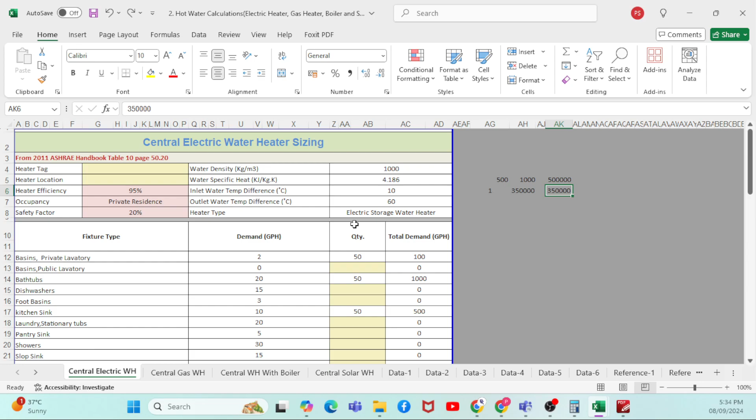Here what is the difference? You have a centralized water heater equipment. Say for example, you have a big water heater, a big calorifier. You heard about calorifier, right? Everyone knows the calorifier. The calorifier is nothing but storage. For normal water, you have a GRP tank or a concrete tank where you are going to store the water. But when you talk about hot water, you cannot store it in the normal water tank. You have to store it in the calorifier, which is insulated to be capable of storing that hot water.

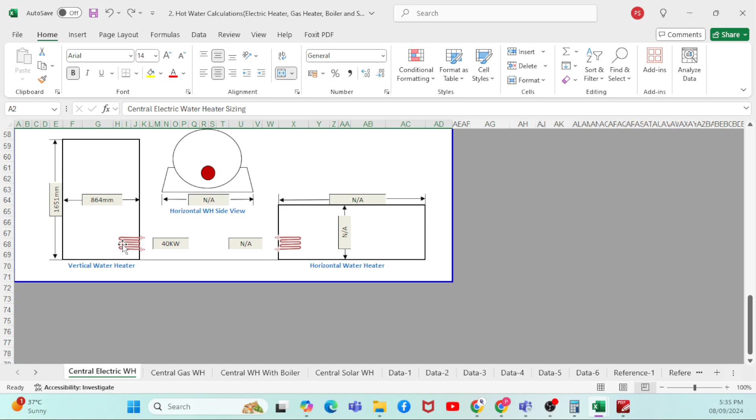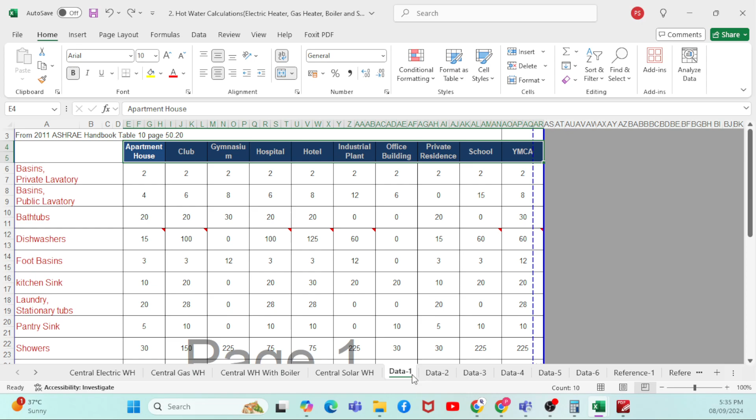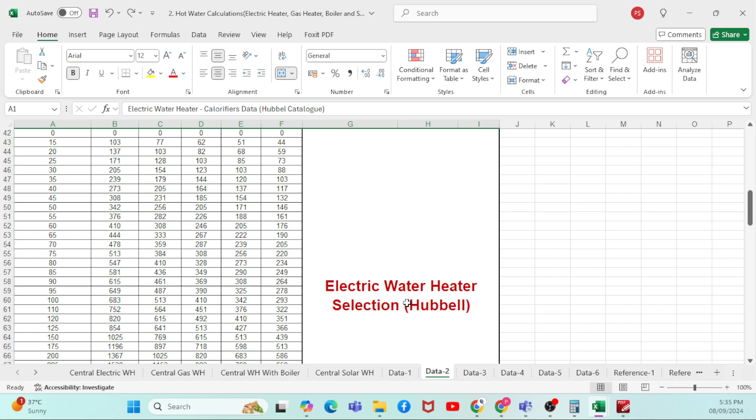So this particular equipment is called a vertical water heater, which is a very big water heater, like a calorifier with the electrical element inside. This electrical element will be calculated based on the capacity we are going to calculate. Clear, right? Now if you go to the data sheet, you can see that there are two items. One is the electric water heater calorifier data sheet, and another one is the electric water heater selection, the water heater element. So here is how we are going to calculate the central water heater.

Say for example, you have the same calculation. The only difference is the number of equipment will be more. Assume that if I have 500 keys, I may have 500 lavatories, 500 bathtubs, and 500 kitchen sinks. Based on that equipment, you can see the total water requirement, which will be 16,000 gallons per hour. So it's huge. You cannot go with individual water heaters. Assume the total consumption will be this much.

Based on the same calculation, you can calculate 0.3, the demand factor for that particular application for private residence. Then you can calculate the total probable maximum demand, the calculated storage capacity, and then the total thermal power requirement. Up to here the procedure will be the very same.

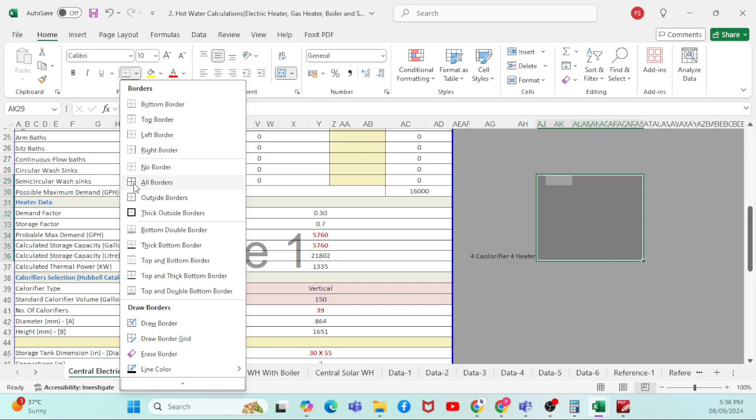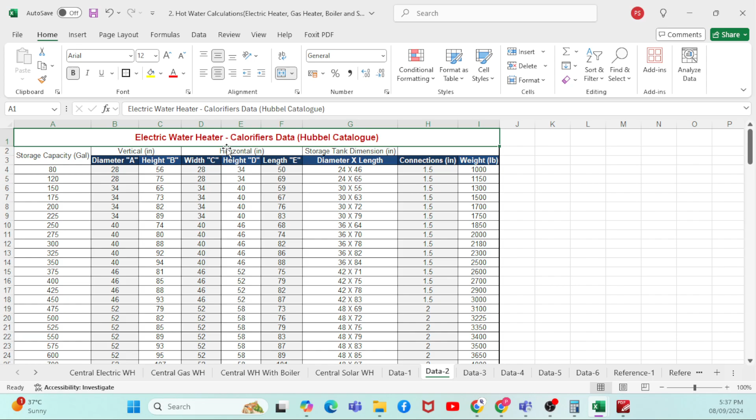But why do you need the selection? Because say for example, I'm going to go with one equipment room. When I do the space planning, I want to keep all my equipment there. If it is a vertical water heater or horizontal water heater, I should know the size, right? So if I go to the data sheet, I can calculate my total water heater calorifier requirement, the storage capacity. Based on the storage capacity and the manufacturer, I can calculate the vertical height, or if it is horizontal, the dimensions, so that I can do the space planning. So what is the overall height of the storage tank?

Clear, right? Anyone have doubt? Selection of water heater for the individual water heater, for the centralized water heater. No, sir. It's okay. Okay, so this is based on the storage capacity.

So when you talk about individual water heater, your capacity will be assumed 15 liter or 30 liter or 50 liter or maximum like 100 liter. But when you talk about centralized water heater, your capacity starts from 80 gallon to 5,000 gallon.

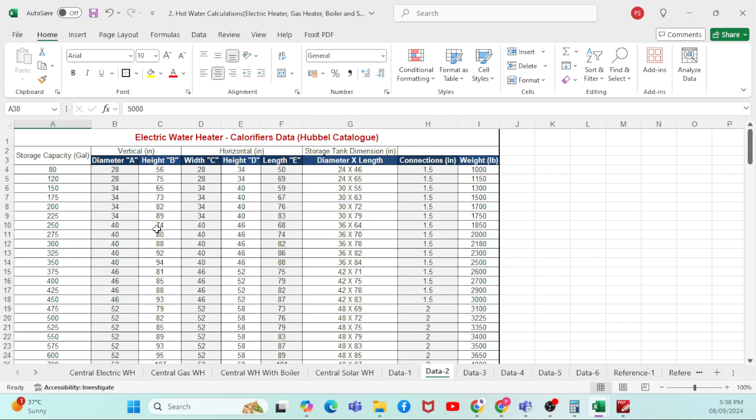So if I talk about liter, it starts from 300 liter to, say for example, 18,925 liter of water. I can design with a centralized water heater.

So depending upon that I can select vertical water heater in case A and B. In case I go with horizontal, what is the width C and D and length. If I go with the circular, then I have a diameter and length. Then I have a connection size, I have a weight. So depending upon this dimension I can select the room spacing. Clear, right? Then I can select the input power.

Input power, you need not do the selection by means of this manufacturer. You can also do the calculation, or if you want to go with the manufacturer selection, they have given the input value here, and then the gallon per hour, how much gallon per hour based on the temperature, you can get the input power. So depending upon that you can select the centralized water heater.

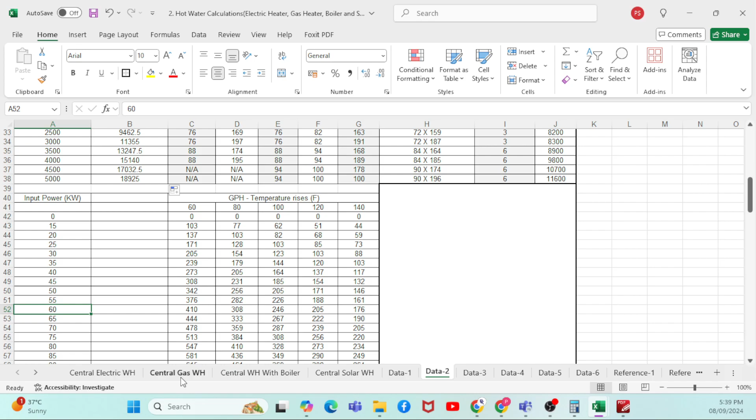Any doubt, Aditya, Rias? Simple method. If we calculate, we only need the total gallons for selection? There are two items required. One is the total gallon, and another one is how much heat is required, or what power is required, because power and heat are the same. Clear, right? Yeah, clear.

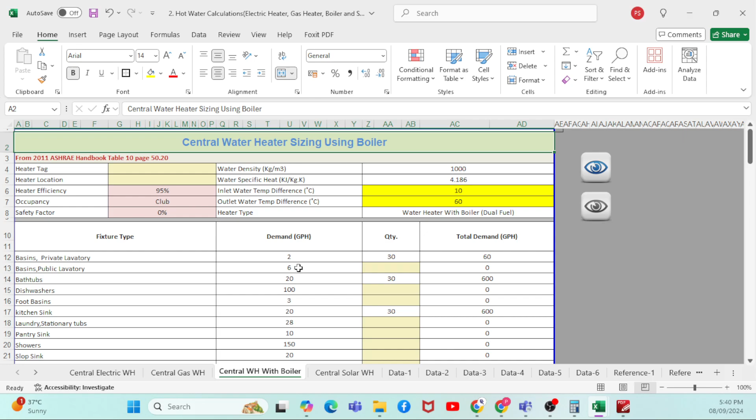Next we will go with the centralized water heater with a boiler. The procedure remains the same. Say for example you have different types of fixtures here, then you have different quantities depending upon the requirement, then you are going to calculate, right? Then you select the material. Depending upon the demand factor, storage factor, probable maximum demand, you can calculate the total storage capacity and thermal power. Up to here everything is the same.

Similarly to how you select the central electric water heater, you are going to select the boiler. I'll be sending you one video for the boiler; just watch the video and you can understand how the boiler works. Say for example this is the boiler. Inside there is a furnace. So when you switch on the burner, this furnace will produce the heat inside the furnace coil.

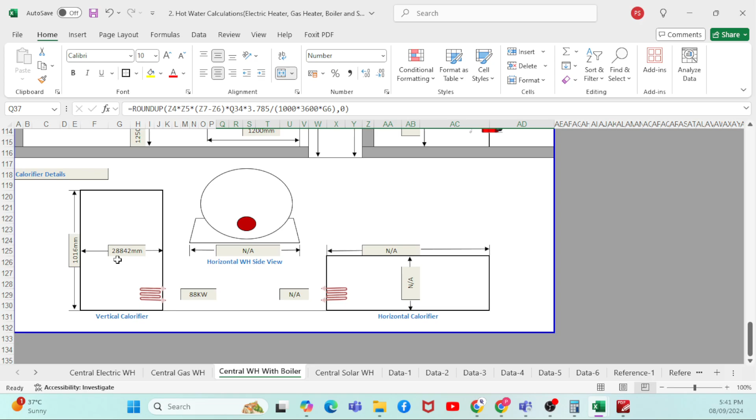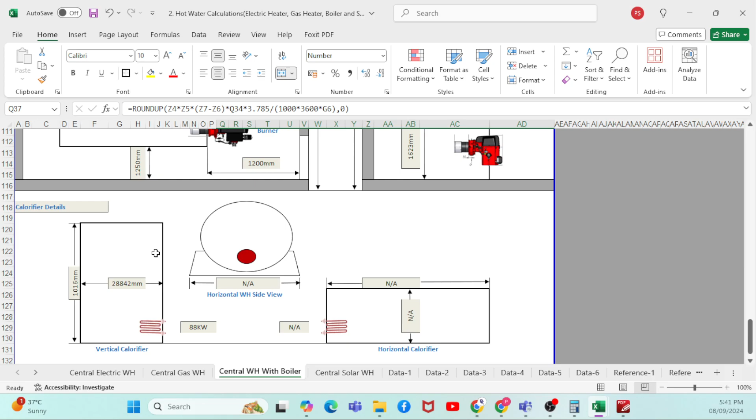With this furnace coil, you will have a calorifier here, then from the calorifier to your boiler there is a water supply connection. There is inlet water and outlet water to the fixtures. Between calorifier to boiler and boiler to calorifier, there is a closed circuit, which will transfer the heat energy. Instead of a heating element, there will be another coil inside connected to the boiler. You understand what I'm saying?

Now, when the burner is on, the burner will produce the heat. It's the same as if you go to a coffee stall or tea stall where you have a furnace; the boiler and furnace are the same concept. The furnace will heat the water, and that water will be transferred to the calorifier, and that hot water will be utilized for the plumbing fixtures. So here the elements are the water heater, calorifier, and also the boiler selection.

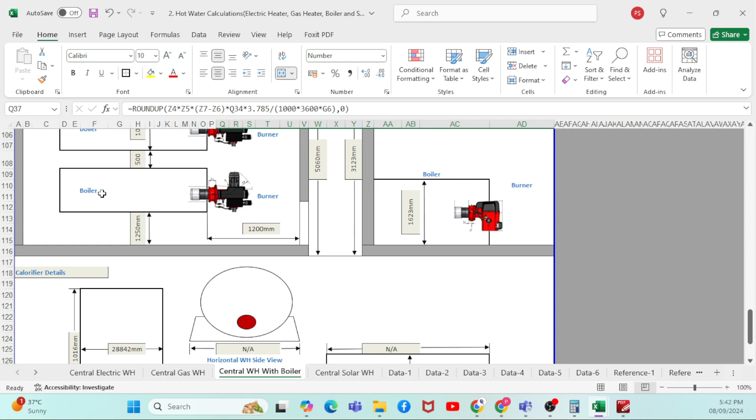So when you go to the data sheet, you can see the boiler here. This is the boiler, you can see the furnace. This is one of the manufacturers, Viessmann. With this manufacturer you have different models, and each model depends upon the capacity, rated output, how much heat is required. This heat is what you are going to calculate here.

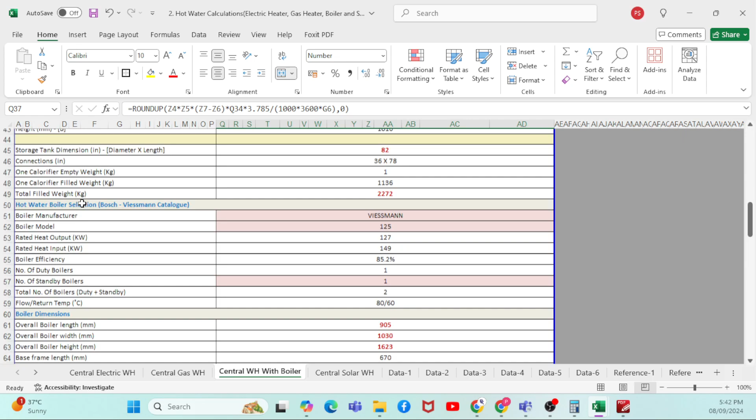Remember, when you calculate how much heat is required, based on that heat you are going to select the equipment. Now since here it is 88 and the gallons per hour will be 486, how are you going to choose? You can choose 300, two numbers, or if you choose 500 it will be one number, because my storage capacity will be 486.

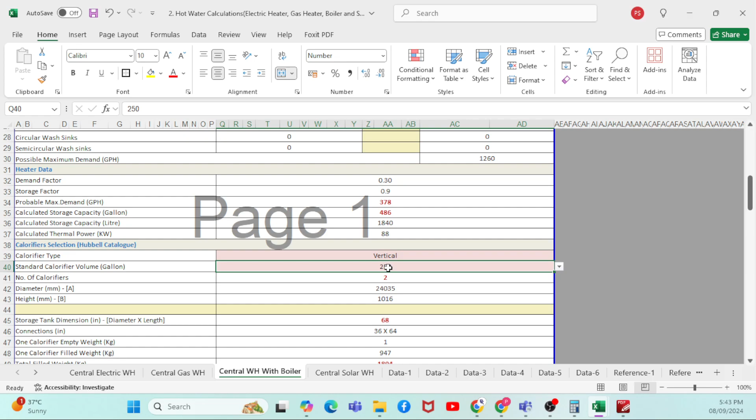If I choose 250, I need two calorifiers, right? Because this is the storage capacity. So what is my calorifier type? 250. So if I go to this particular model, I can select a calorifier of 250 gallons, two numbers. This is the electric water heater calorifier data sheet. I can select two numbers.

So what is the dimension? If I do space planning, inside I have a boiler and a calorifier. Based on this dimension, I can size my room. And if I go to the boiler, what is required? Boiler length, boiler width, boiler height, then base length, base width, then installed burner height. This is all the dimensions, flue and connection details, everything.

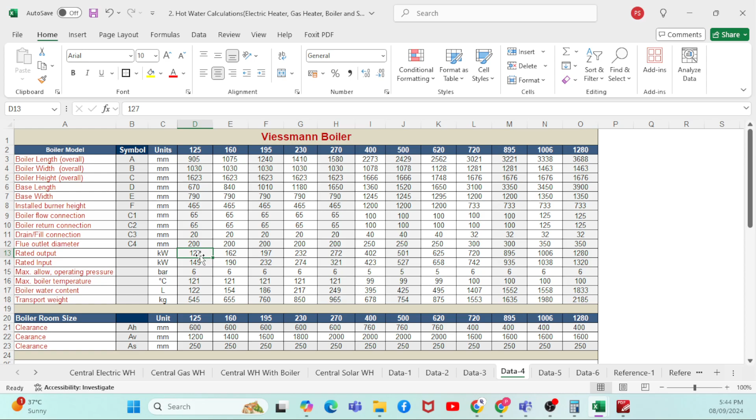But what is the technical data? This is my rated output, how much heat I have to produce. So if I go to my boiler, what is the heat? 88 kilowatts, right? So in the data sheet, I can choose the 125 model, because I need 88, but this particular machine can produce 127 kilowatts. So if I choose 125, what clearance is required?

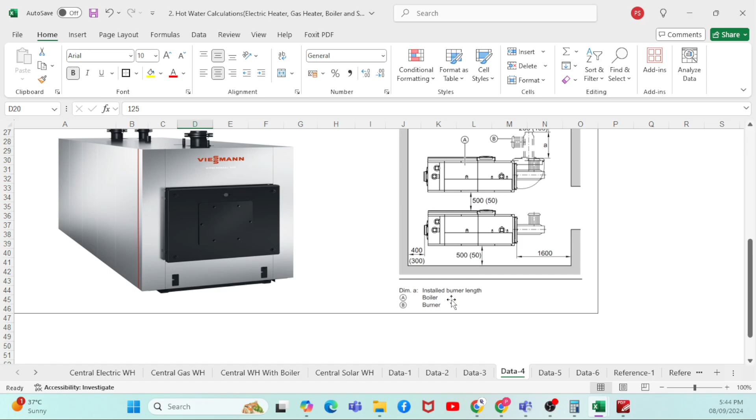If you talk about clearance, what is the boiler room clearance? You can choose the room clearance here. So this is my room. Inside there are two boilers, depending upon my capacity, and you can see the dimension here, 1600 mm. And what is the boiler dimension? 1000 mm. All this data comes from the data sheet. So this is all formula based. Clear? With this information, I can do the space planning.

Anyone have doubts regarding the boiler selection? I will be sending you one video. Just see the video, a good 3D animation, and you can understand how the boiler works.

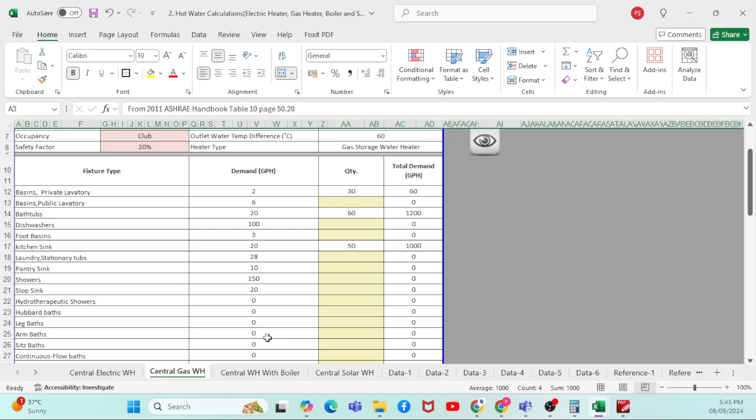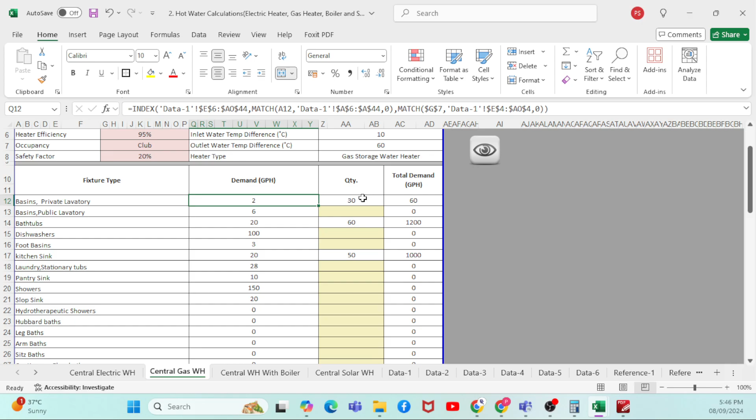Okay, then if I go to the gas water heater, it's the same type. Everything is based on ASHRAE. What are you going to do? You calculate the type of building, then the fixture type, then the capacity, how much quantity inside that particular area. Then you get the total demand.

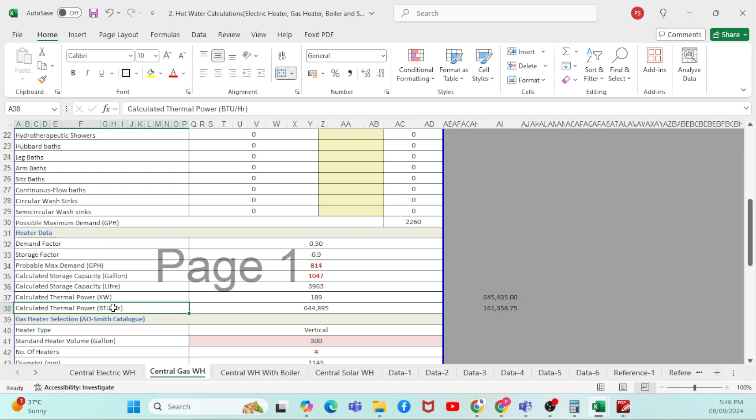Based on the demand, your demand factor and your storage factor, you will get the probable maximum demand and calculated storage capacity, in gallons and in liters. You can also calculate the thermal power in kilowatts or BTU per hour. Since it is a gas element, normally the gas consumption will be in BTU per hour. Here also you select the gas heater. There is a data sheet for the gas heater.

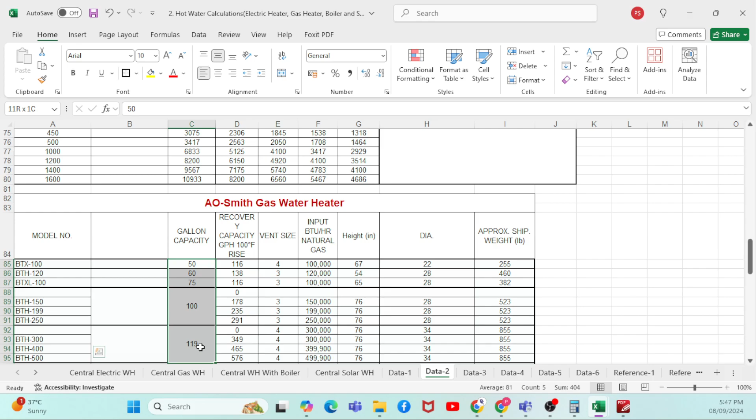You can see one of the gas water heaters. There are different models available depending upon the gallon capacity and your consumption, your input BTU per hour. You are going to calculate these values, and based on that, you can select the model. Go through this data sheet. If you have any doubt, we can discuss in the next class.

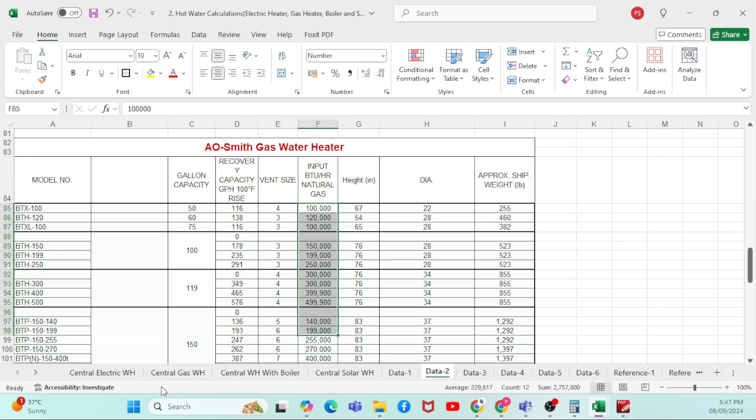Okay, Aditya. So today we have talked about individual water heaters, centralized electric water heaters, gas water heaters, and boiler water heaters. With this we will stop, but I want you to go through and study this calculation sheet, then let me know whatever doubts you have. Solar water heaters we will discuss separately because they require one complete session. Okay.